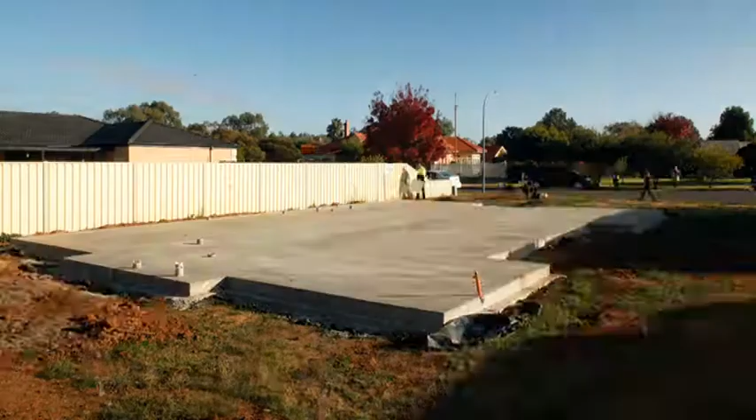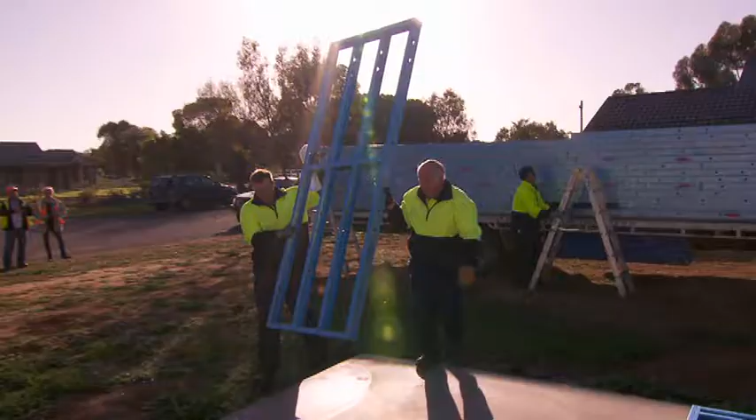I'm Alan Gibbs from ENDUROFRAME Building Systems, and we'll show you how easy it is to install our building system on your construction site. This video offers general installation advice. Refer to the Enduro Wall and Enduro Truss design manuals, construction guides and the BCA for full details. ENDUROFRAME structures are detailed using our latest CAD technology and utilising Australian-made TrueCore steel. The result is a building system that's been designed for the builder.

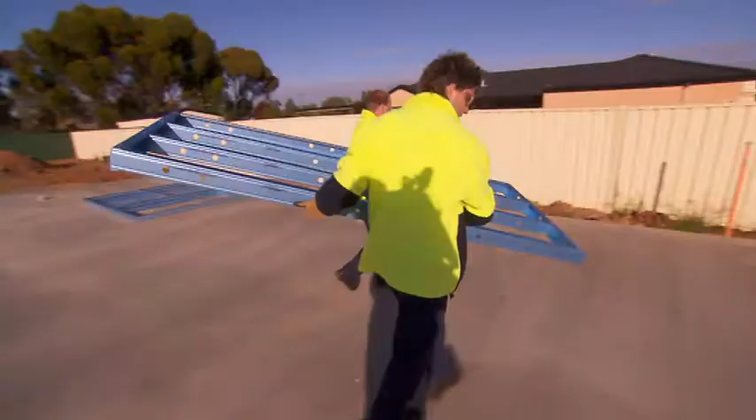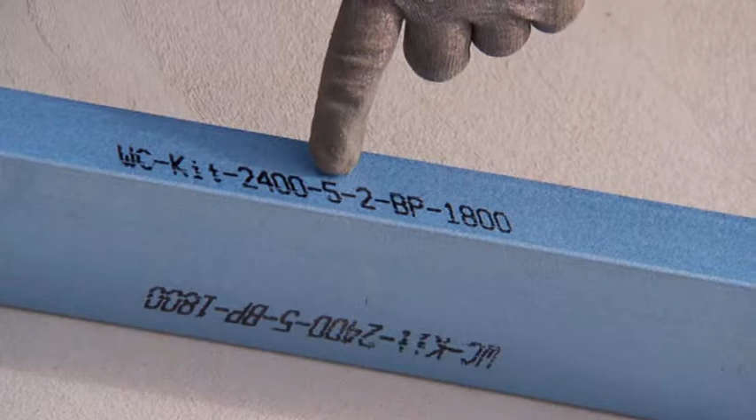In the previous ENDUROFRAME building system video, we showed you how to assemble a kit of components for your own on-site assembly. Now we're going to show you how to install the Enduro Truss roof system and the Enduro Wall framing system, which together make up the lightweight ENDUROFRAME building system. You and your crew will find it's easy to install on virtually any building site. You'll see that each part is marked with the job name, frame or truss number, making it simple for you to work out which part goes where.

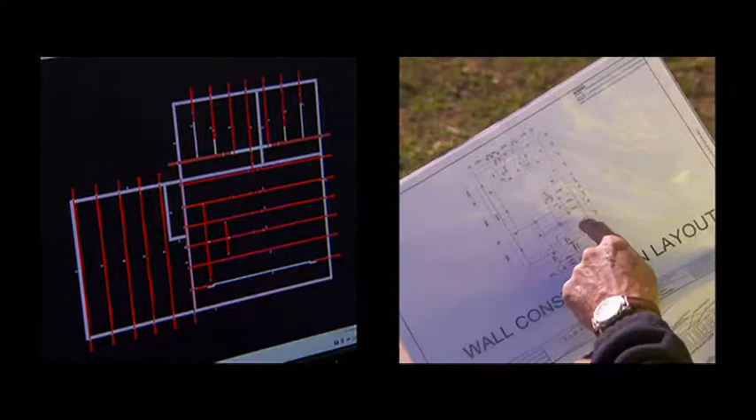Our first consideration is worker safety. The HIA recommends a safe work method statement be written and that the worksite conforms to the safe work practices in the BCA. And make sure you read our installation manuals before you start work. The ENDUROCAD system outputs layout drawings to locate the wall frames and the trusses on site, plus the documentation for authority approvals. Okay, let's look at how to erect the Enduro Wall framing system.

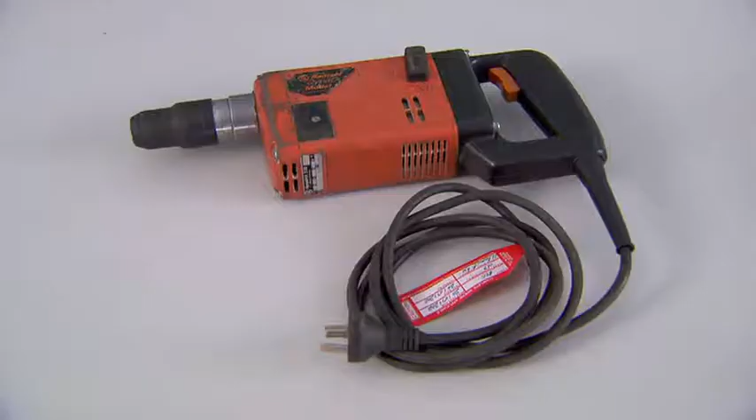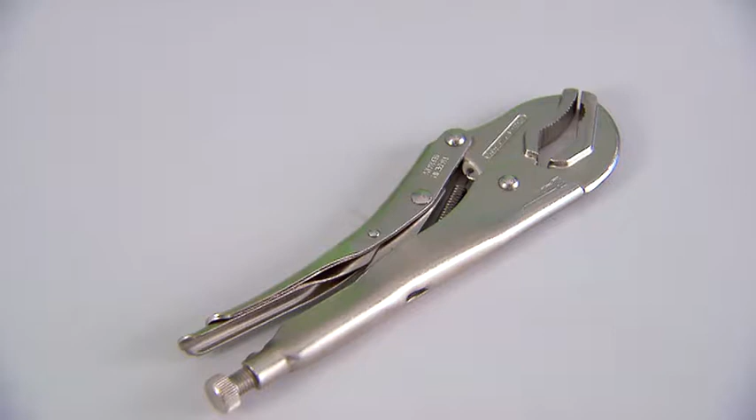Here's the tools you'll need: a hammer drill, screw gun with hex head bits, a handheld grinder, nail gun, cordless drivers, circular saw with a metal cutting blade, tin snips, spirit level, marker pens, string lines, clamps or vice grips, measuring tape, a hammer and a hacksaw. And we almost forgot, you'll also need a broom and a step ladder.

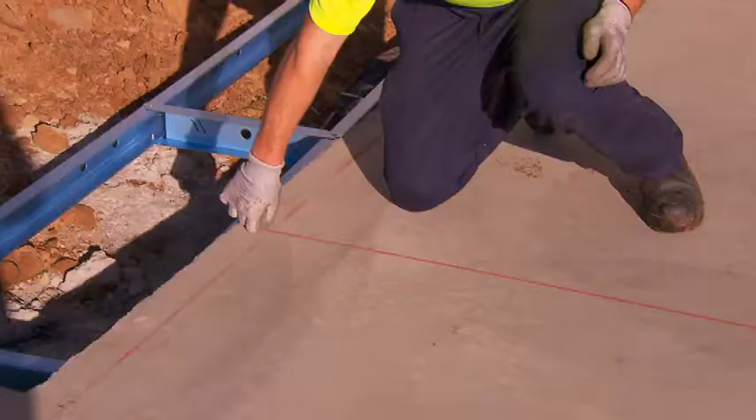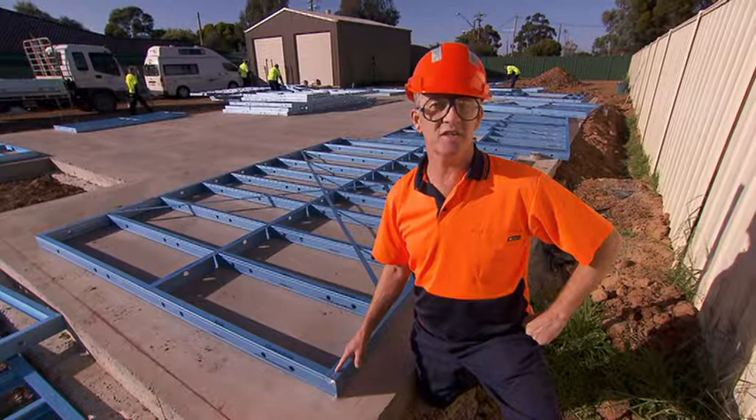Using the project architectural drawings, mark a chalk line on the inside of the wall positions on the concrete slab or platform floor. Where wall bottom plates are not pre-painted, an impermeable membrane, such as polyethylene, should be installed under the wall frame to isolate it from direct contact with the concrete foundation. The membrane should extend up the weather side of the flange of the bottom plate.

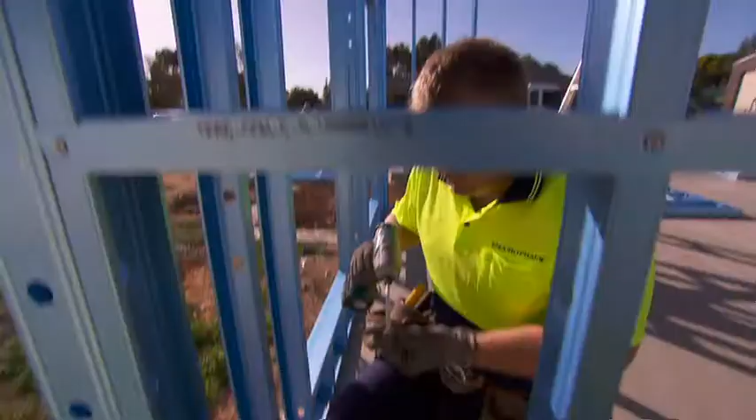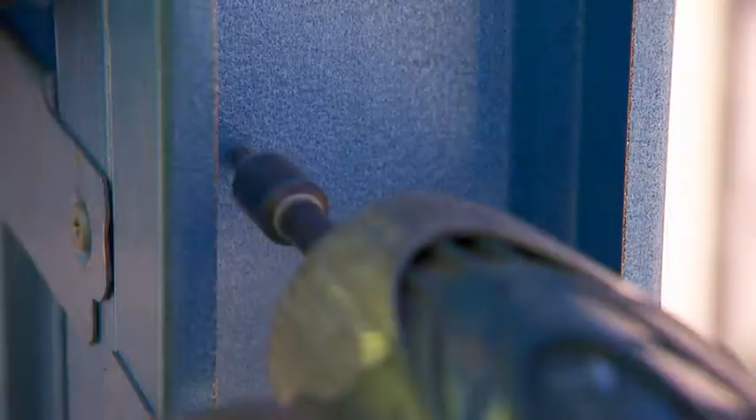Unpack and lay the wall frames close to their intended position according to the drawing. Starting from one corner of the building, stand two frames to the chalk lines to make a square corner. Screw the panels together using hex head screws at the top and bottom plates. Continue standing walls and attaching them together, working outward from the corner, making sure you set the interior walls inside the building before completing the exterior walls. Run a string line between the two corners and align the wall to the string line.

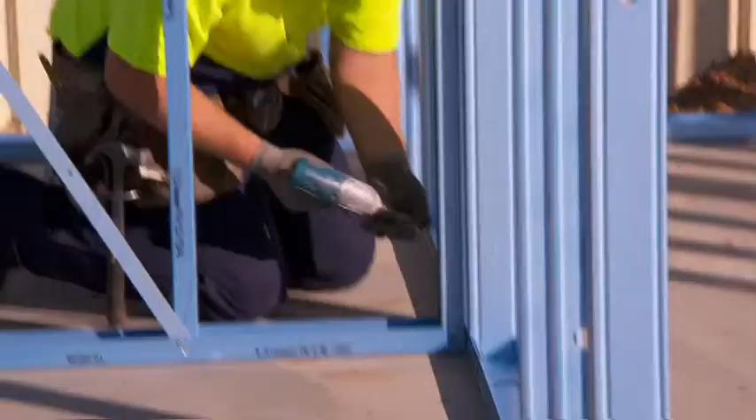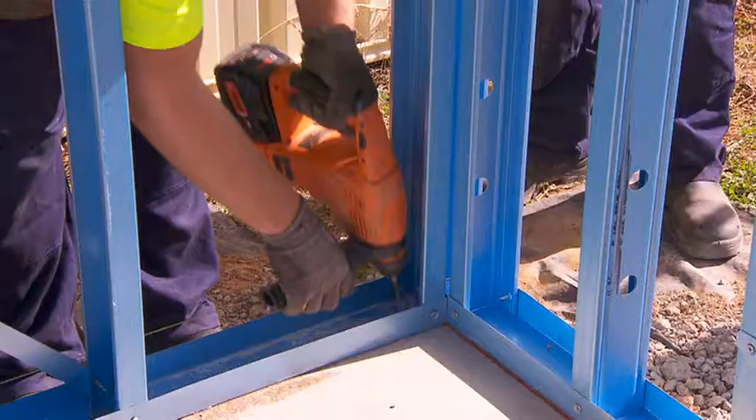When all walls are standing, complete the frame-to-frame connections in accordance with the details in the construction manual. Move the frames to align with the marked wall position, check room sizes and ensure rooms are square. It helps that the branding is always on the outside, which is the same way the arrows point on the drawing. For a concrete slab, drill out the holes, clean them and then insert the anchor bolts. Install the hold downs in the locations specified.

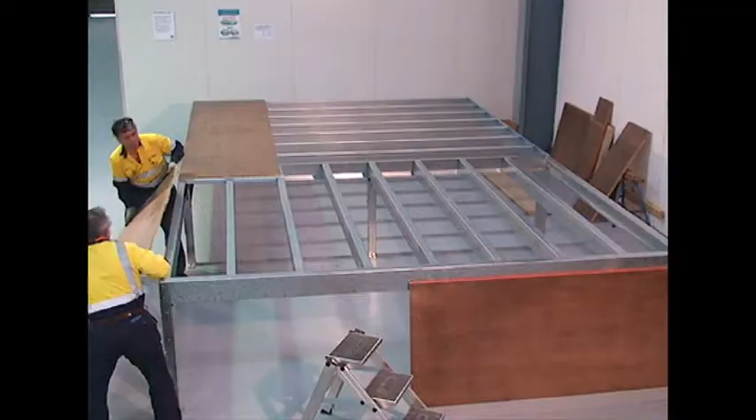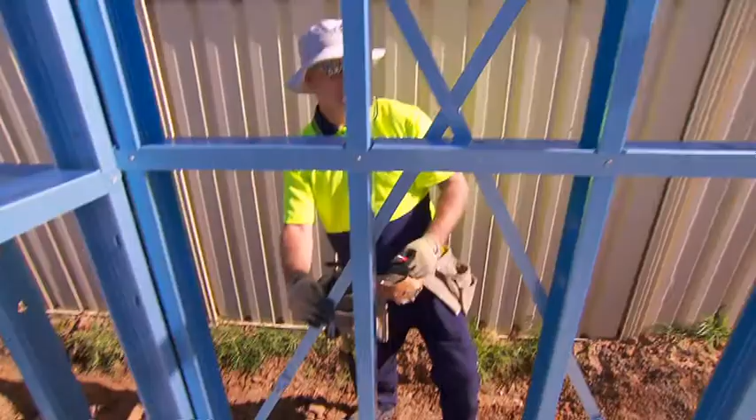For framed floor construction, self-drilling screw fasteners are used for fixing through the bottom plate into the floor joist or perimeter member. Hold downs are generally located at panel ends, brace points and jamb studs, nominally at 1200mm centres adjacent to the studs. After you have completed the installation, check that all hold downs are correctly located. Use a plumb bob or level and set the walls to vertical by increasing or decreasing the tension on the diagonal bracing. Ensure bracing straps are tight and screwed to each stud.

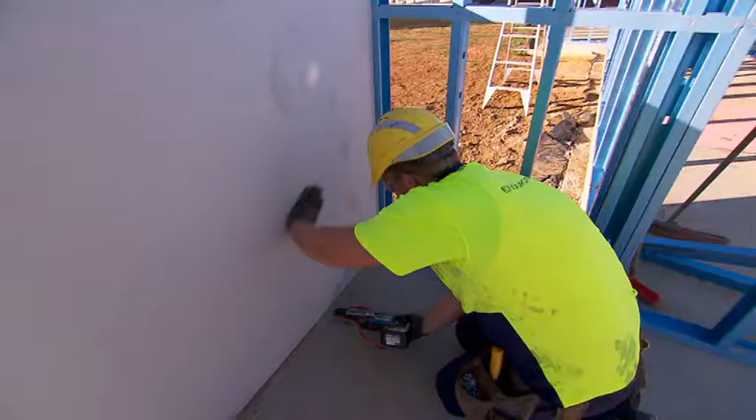Having completed the wall frames, proceed with the installation of the next storey floor or roof frame. Aligned service holes make cabling and plumbing easy, and straight walls give a great finish to the plasterboard. Follow-on trades will find working with Endurowall frames a breeze. Install the Hardie brace according to the manufacturer's recommendations.

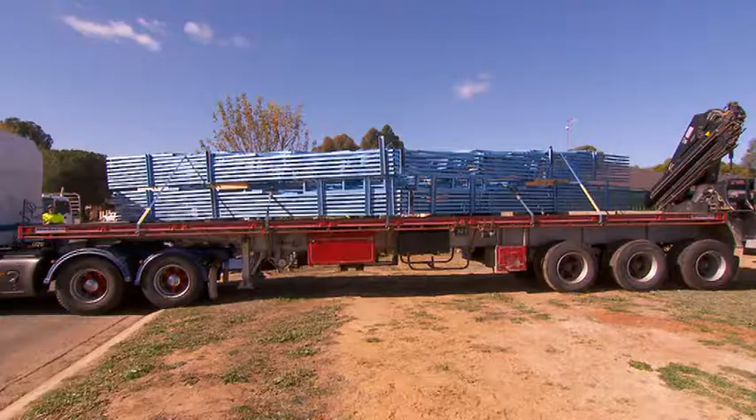Now we'll look at roof frame installation. Stack the trusses in the order they will be required for installation. ENDUROCAD software has produced drawings to help us install the roof frame.

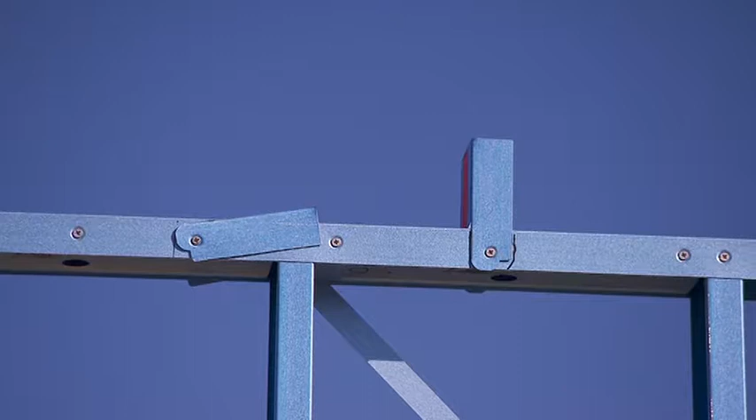Your frame may come with factory installed truss hold down brackets. If these are not installed, then using the truss layout drawing, mark the top of the wall to indicate the truss locations. Install the truss hold down brackets to the top plate of the wall at each truss location using the connection system specified in the construction manual.

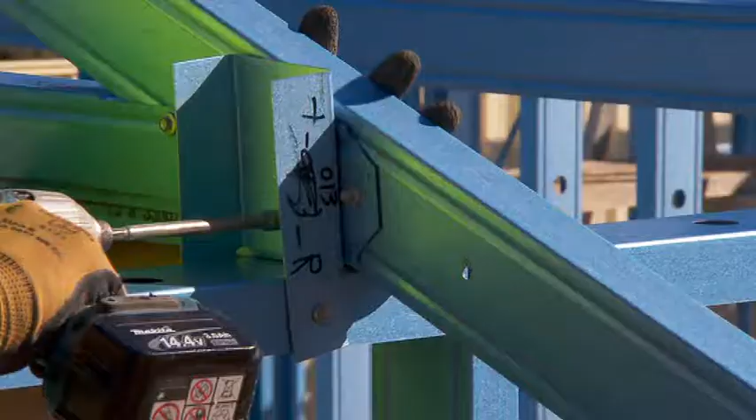It is generally best practice to install girder trusses and the hip ends before proceeding with the installation of standard truss runs. Stand the first truss and screw through the face of the connection bracket into the bottom chord of the truss. Some of the heel screws may have to be removed to have the truss fit flush against the clip. The screws used to attach the clip to the truss replace the screws that you have removed.

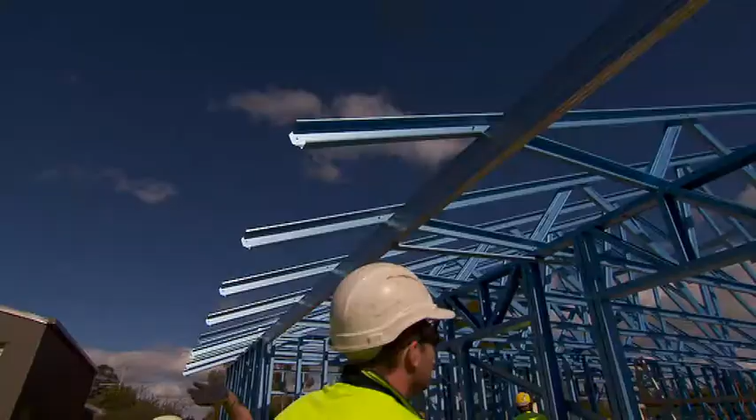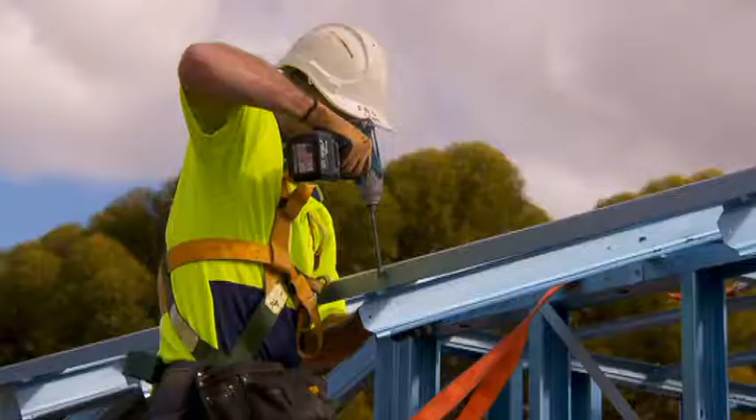Make sure the truss is centred properly on the building by measuring the overhang on each end of the truss to see that they are in accordance with the drawings and they are standing vertical. Install the next two trusses and screw a piece of top span batten into the top chords of the trusses to temporarily brace them. Extend the top span batten out to catch and brace the next trusses.

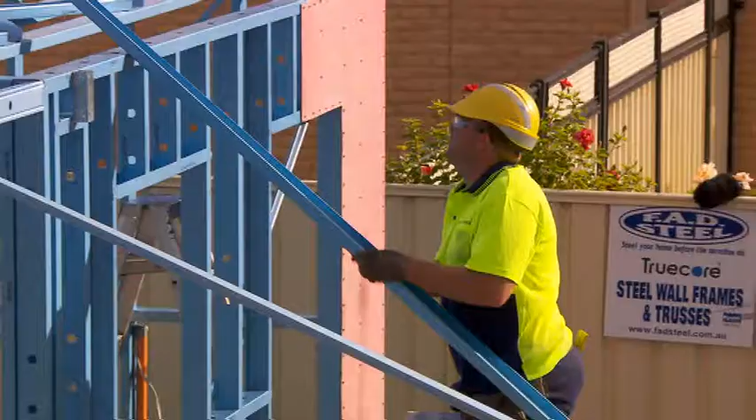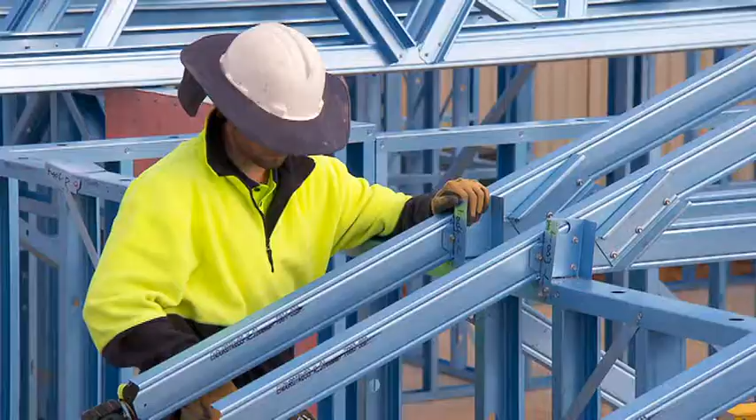When all trusses are erected in their nominated locations, assemble the hip rafters as shown on the detail sheets, fixing through the top chord of the trusses into the hip rafter. Mark the overhang length on the jack rafters using the truss overhang as a guide. Position the rafter with the branding located at the outside face of the wall and square to the wall.

Fix the jack rafters to the top plate and truncated truss top chords in accordance with the connection drawings. Install the bracket between the hip rafter and the jack rafter and install bracing over the top chord of the trusses. Refer to the construction guide for the connection drawings and screw specifications.

Once all the trusses and rafters are erected, install the roof bracing in accordance with your connection manuals. Bracing is generally placed as close as possible to 45 degrees to the sidewall, but not below 30 degrees. One end of the bracing is fixed to the wall top plate, adjacent to the truss position, and the other end to the apex of the A truss. The bracing is then fixed to the top chord of each intermediate truss. In the hip zone, no additional top chord bracing is required.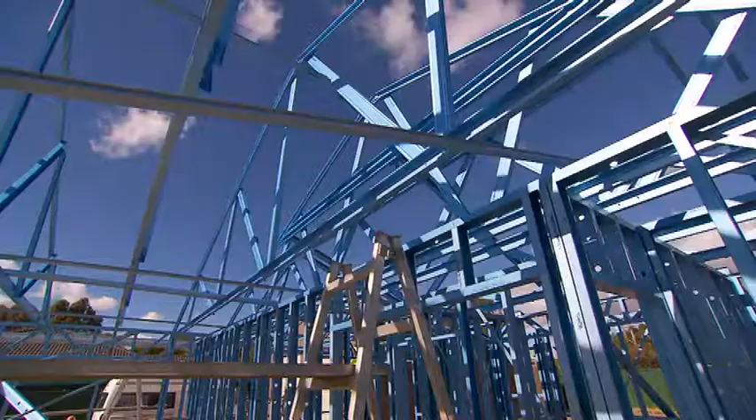Install the appropriate top span battens in accordance with the cladding requirements. The ceiling battens must be fitted immediately after the roof trusses have been installed. By fixing the ceiling battens at this stage, the roof trusses will be laterally restrained without the need of bottom chord ties.

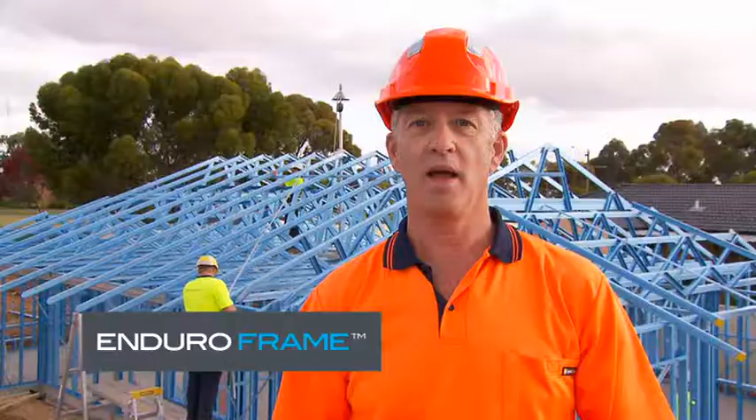We hope this video has shown you how simple and easy it is to install the ENDUROFRAME building system. The smart, simple solution to house framing. Simple, easy to follow assembly and installation drawings tie the whole system together, making the ENDUROFRAME building system quick and easy to use. And TrueCore steel ensures consistent straightness and quality. And finally, we think you can now see how you can profit from putting the ENDUROFRAME building system to work for you.